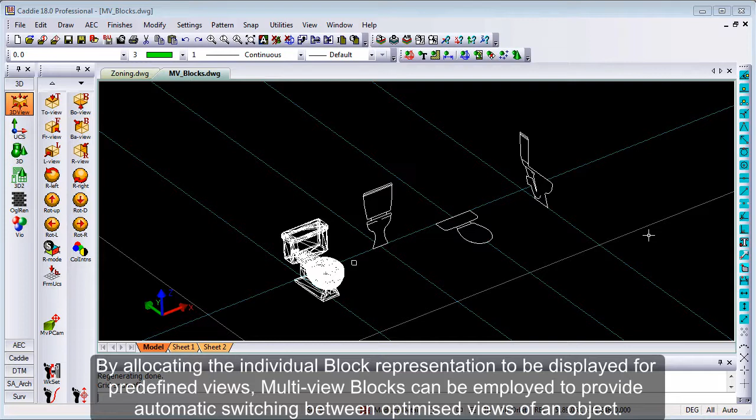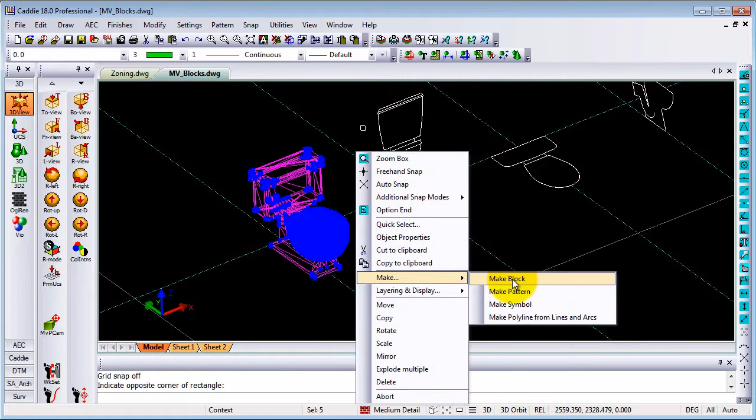The first thing that I'm going to start with is having a look at this drawing. This drawing consists of a couple of symbols that I've created. I'm going to compile them into what we call the multi-view block or MV block. The first thing that I'm going to do is take this 3D symbol and make that a block. The block I'm going to call WC3D, which is the 3D block. I'm going to pick an origin by snapping to its construction intersection at the back there and create the block.

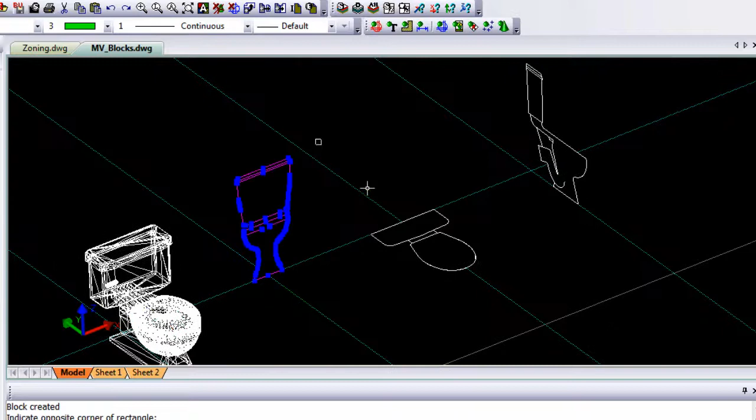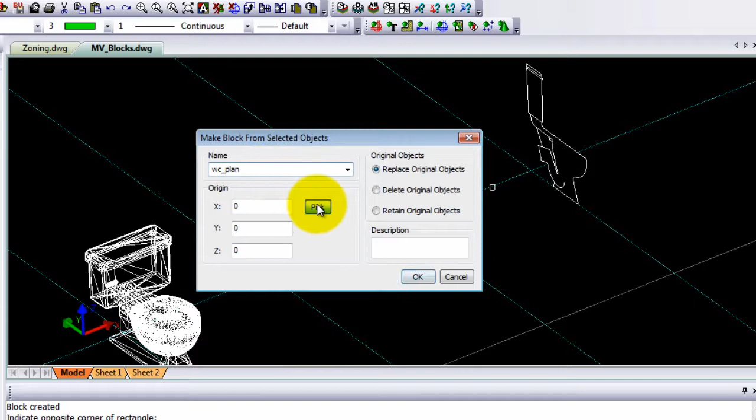The same I'm going to do with the others, so I'm going to select that one, make that a block, call it WC underscore front elevation with the origin at the bottom, as well as the next one. Make a block WC plan view with its origin at the same corresponding location, and the last one WC underscore side elevation with its origin once again corresponding to the others. Right, so in this drawing we've got 4 different blocks or block references.

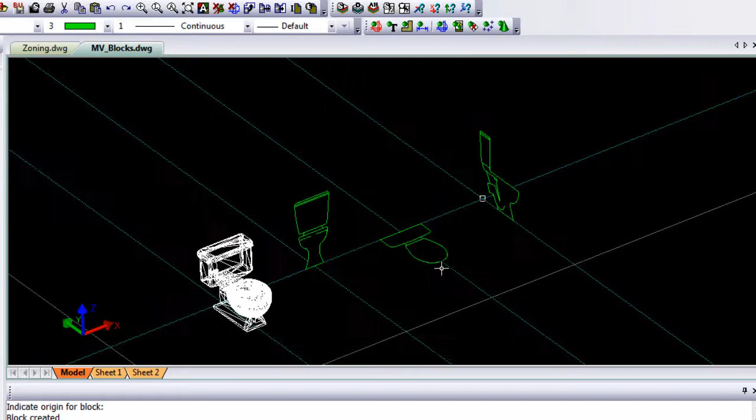Now to create a multi-view block from that, I'm going to go into my AEC Style Manager. In the Style Manager, Multi-Purpose Objects has something called Multi-View Block Definition, so I click on that one and I'm going to create a new one, call it WC Multi-View and apply that. If we have a look at the view blocks, general is basically where I'm going to add blocks into the list. So in the model itself, I'm going to add the 3D block and it will be available or displayed in all views.

However, in my general view, I'm going to add the front elevation, which will only be visible in front and back, not any of the others. Then I'm going to add another one which is in plan, and that will only be visible in top and bottom. So I switch all the others off, and I'm going to add side elevation, and that will only be visible in left and right. Right. So what we basically have is a multi-view block which in any general 3D orbit will display the 3D view, but under general it will display the front elevation in front and back, the plan in top and bottom, and the side elevation in left and right.

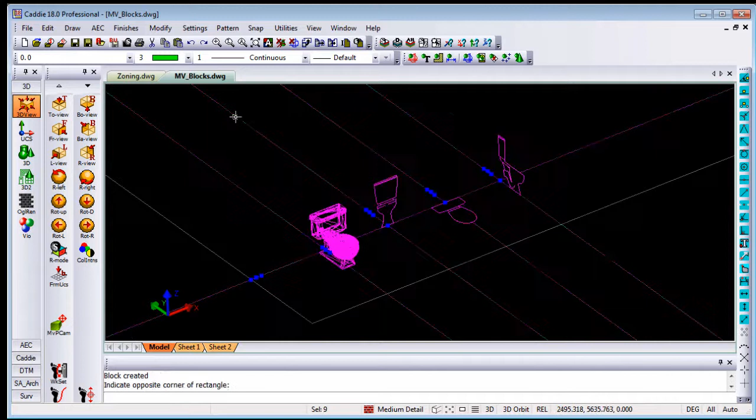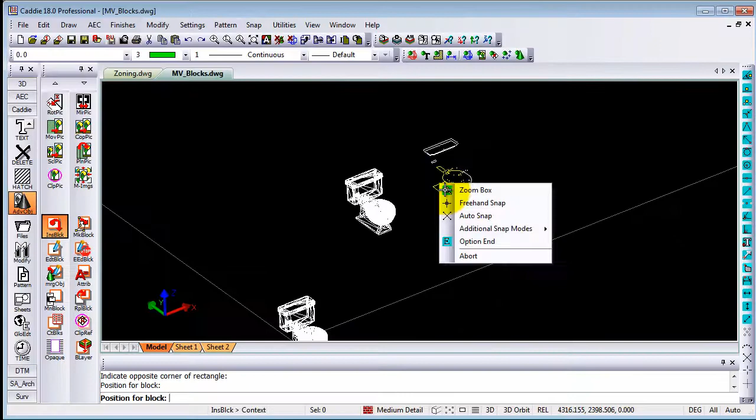So let's have a look at how to use this. I'm going to delete all the information I've got. When I go to my normal Caddie application, Advanced Objects, and I insert a block, you will see you can either insert standard blocks or multi-view blocks. In the multi-view blocks, I'll have one called WC Multi-View, and once I insert it, that's exactly how it's going to look. So it shows you a little normal view of that block. Change the render mode so we can see a bit more clearly.

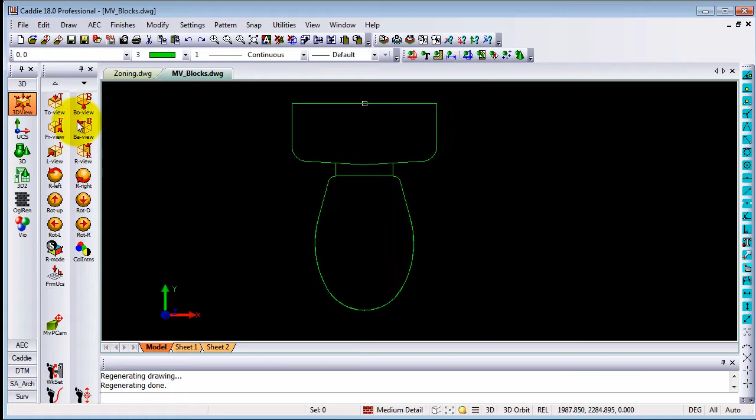The nice thing about this block now, it's a multi-view block. If I go to my 3D views and I go to top view, it will display the 2D top view information. If I go to front view, it will display the front elevation, and if I go to left or right view, it will display the other information. As soon as I do an orbit and I regen, it will display the 3D object as specified before. So that's basically what multi-view blocks are. It's a block consisting of multiple other blocks which you can then specify to have different symbols being displayed at your different 3D views.